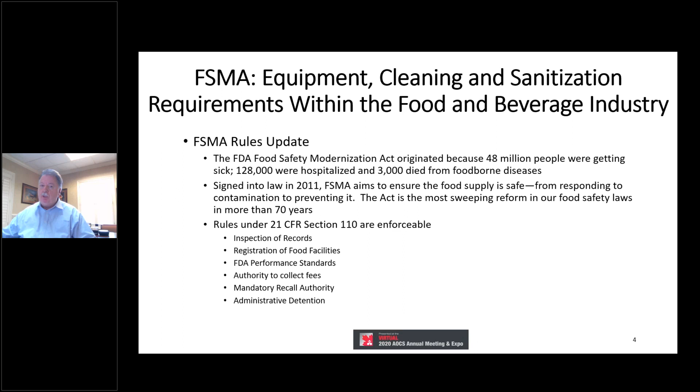The goals of FSMA are that we want to assess and implement preventive controls on a broad basis. In essence, we want to fully understand what and where are your risks and what appropriate controls are preventing those individual risks. The FDA expects that they will be going from reactive to proactive in the preventive strategy, which is the essence of FSMA. And the expectation is the preventive control rules for the initial enforcement focus. Expectations are that there is an active monitoring program within your food facility with corrective actions taken that are proactive in your food safety plan.

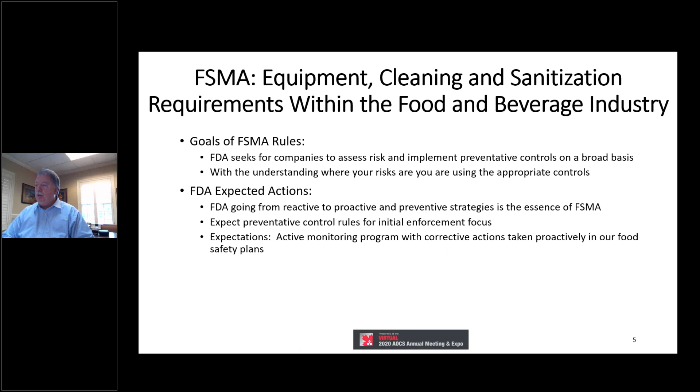Specifically, Subpart L deals with protecting food from intentional adulteration, where the intent is to cause large-scale public harm. For the purposes of this review, we will focus on Subpart L only, which addresses equipment, building design, and cleaning and sanitization procedures. This rule does require that a food facility must implement measures to protect food against intentional adulteration. In addition, it requires domestic and foreign facilities to address vulnerable processes in their operations to prevent acts that could cause large-scale public harm.

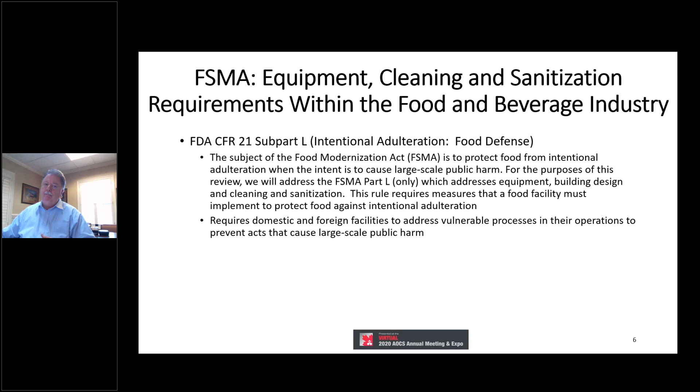Now, I realize this is a little bit of an eye chart, but hopefully you'll focus on the dates to the right. This is a publicized FSMA document that identifies the critical dates of implementation for food facilities. They're broken out by the size of the company. For instance, a large business is considered to be 500 employees or more. And then there's small business as well as very small. One thing I want to emphasize is that a lot of these dates have either come, are here now, or are very, very soon for the small businesses. So the emphasis here is FSMA rules are enforceable based upon these dates.

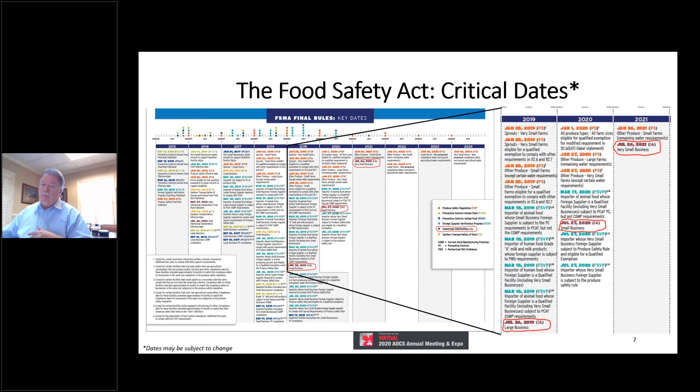The FDA guidelines specific to Subpart L, again, identifying possible routes of microbial contamination in produce, set the requirements to prevent the introduction of pathogens. So in essence, equipment, tools, and buildings are one identified route of contamination because they may contaminate the produce with pathogens, and adequate cleaning and sanitization is an important part to minimize that contamination.

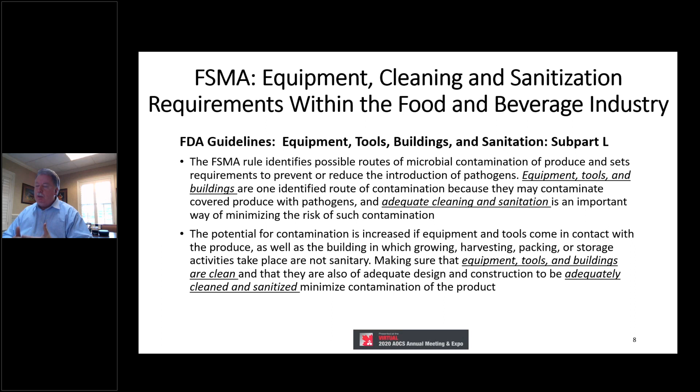The potential for contamination is increased if those equipment and tools come in contact with the product, as well in the farming sense for growing, harvesting, packing, or storage activities that take place that are not sanitary. So in essence, we as food facilities have to make sure that our equipment, tools, and buildings are clean, and they are also of adequate design and construction to be adequately cleaned and sanitized and to minimize the contamination of our products.

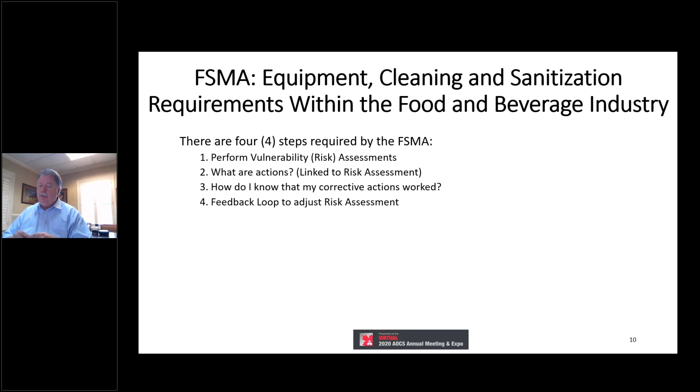So those 4 steps required by FSMA are the following. Number 1, you must perform vulnerability risk assessments. 2, what are the actions associated? Again, you create the action steps directly out of those risk assessments. 3, a question needs to be asked, how do I know that my corrective actions worked? And finally, there must be a feedback loop in order to adjust the risk assessment resolutions.

So I won't take the time to go through the bulk of this discussion here, but just understand the risk assessment is a requirement, and the risk assessment must be prepared by someone that's competent in developing it. The overall goal is to identify your critical control points. These must be identified in a manner that if it's a risk, then there must be a plan to prevent that risk. That could come from a design change, or it could come from an operational change to minimize that risk. That preventive action is really to deliver how to avoid the contamination itself.

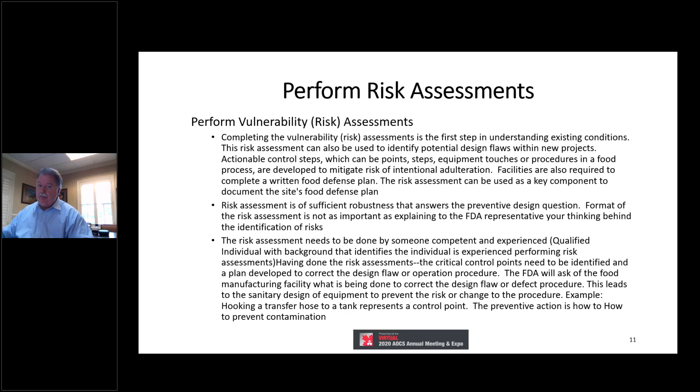Now, one point I'll emphasize with the FDA: there certainly is a lot of focus from the FDA, particularly in terms of the drug environment, as well as contamination from foreign suppliers that are selling food in the continental U.S. or North America. And an argument could be made that says, well, the FDA is just too busy, I don't see them show up at my facility. Well, you need to reassess that judgment. The reason being is the FDA is assigning more third-party companies to perform those assessments, and they're sending letters of compliance to food facilities.

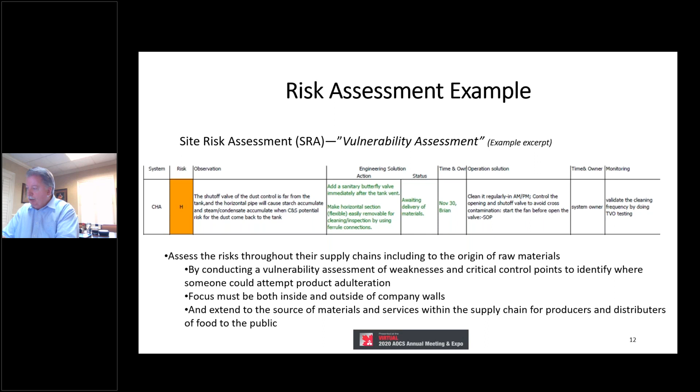So the questions to ask in terms of the risk assessment development is who has access to those critical control points and the food material risk areas itself. Pay close attention to those 4 key areas that we mentioned: the mixing and grinding areas, the ingredient handling, the bulk liquid receiving and loading, and the liquid storage and handling. Those are focus areas that the FDA will gear toward the assessment and risk areas itself. So in essence, you should be prepared for that.

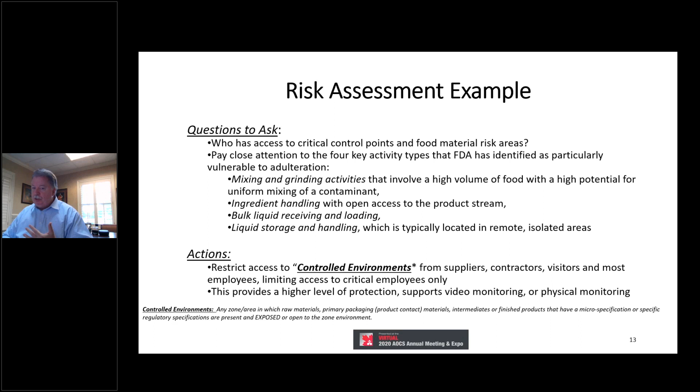The actual actions itself, you need to restrict access to what we call controlled environments. And that includes suppliers, contractors, and visitors, and most employees, limiting the access to those critical points, specifically within your food facility. Those controlled environments itself provide a higher level of protection, both in terms of airflow and material flow. It also supports video monitoring as well as physical monitoring.

Now, this is a design in its simplistic block form for a facility design. And a lot of facilities that have been put together, particularly in terms of a brownfield operation, in essence what you have is a dirty side where you've got your raw material incoming flow, and you have a clean side where you actually induce micro control level. And in the middle, you have a kill step, which could be like an extruder that actually takes it to a 5-log position to minimize microbial risk itself.

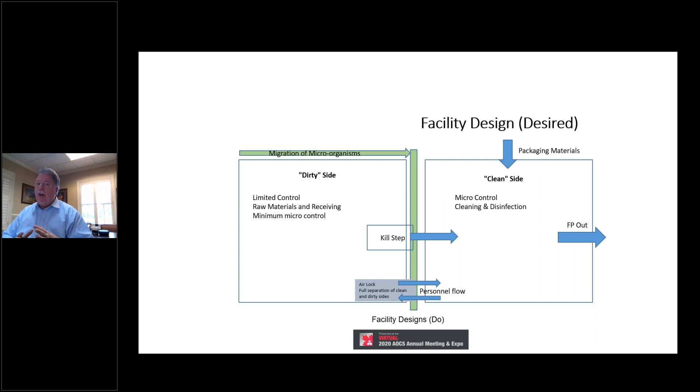The problem with this design is you not only have material flows going back and forth between your dirty and clean side. So envision a forklift that its wheels are dirty and it's directly transferring that contamination from the dirty side to the clean side. Likewise, personnel flow need to be restricted from the dirty to the clean side. So objectively, what you want to have is a physical separation, even to the point of having badge control for your employees. You want to keep your forklifts that are operating in the dirty side from even going into the clean side operation. This is the emphasis itself.

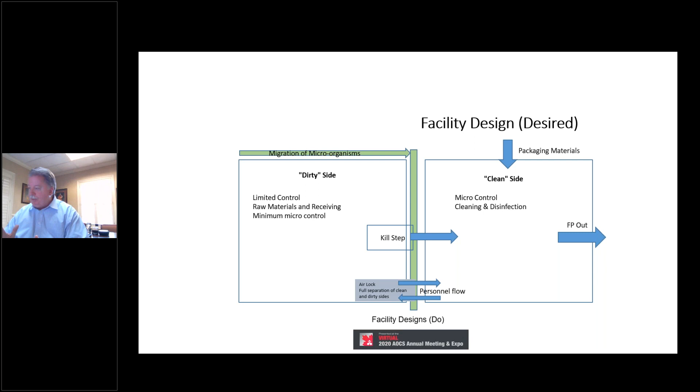Also in terms of the actual passage between the dirty and clean side, you want to maintain that even through a double door airlock. And what you want to maintain is an air pressurization to where the clean side has positive air pressure as compared to that dirty side. So you want to keep the dirty air out of the clean. So you literally want to have about a 10 to 15 Pascal difference between your dirty and clean side, and your airlock needs to be at least a 5 to 7 Pascal difference as a step up point.

So in addition to the development of those risk assessment exercises, some of the key points is to ensure that you're developing equipment standards and specifications for the following: the bulk liquid receiving and loading, the liquid storage and handling, the secondary ingredient handling, mixing and similar activities, again, those top 4, but also areas defined by the controlled environment. Any open product, whether it be in a tank or a pump, heat exchanger, or your primary packaging filler, before it reaches that final package, must be in a controlled environment itself.

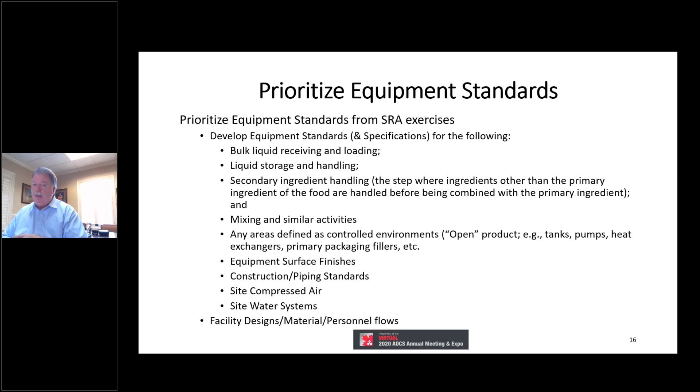What's key is equipment surface finishes, your construction and piping standards, your site compressed air. Point of use, you should have that compressed air filtered to 0.2 micron. Your site water systems are so critical in terms of keeping microbial control, in terms of having a robust RO or a deionized water system. And as mentioned in the previous example, having robust facility design that manages not only the material but personnel flows also.

Those equipment standards in itself, and again, this is an eye chart, so I apologize for that. But the point that I want to identify is there's a level of preferred clean design, a moderate, or even a high risk. The high risk, which is listed in red, if it's designed to those standard levels, the probability that you will have a micro hit is very high. The moderate risk, if systems are designed to that level, you will probably have to have operator intervention to maintain that risk control itself.

Minimal risk, or the preferred clean design, are standards that assist a food facility to maintain the proper surface finish, the proper design, particularly in terms of having full CIP versus COP control. And that stands for clean in place versus clean out of place.

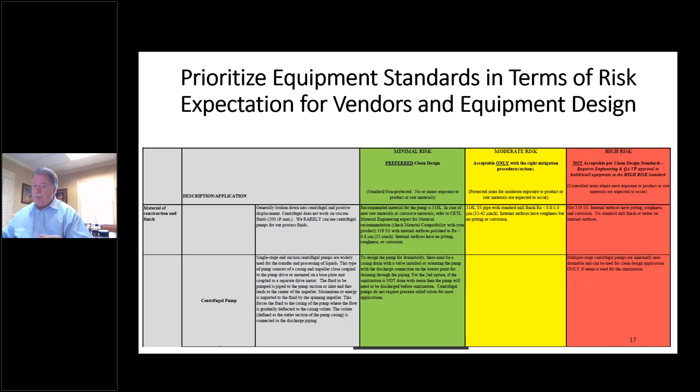As I mentioned, for those equipment specifications, one of the key points is surface finish requirements. All your food facility material surface finish should be designed to an RA value of 0.8 micron or 32 microinches. Now, I put this chart as a comparison to BPE standards itself, which calls out 0.41. But again, 0.8 micron level for an RA value is very achievable.

I would avoid specifying surface finish like, in essence, a 2B mill finish. A 2B mill finish, or examples such as that, is a subjective evaluation, whereas an RA value is actually measured with a profilometer. This actually measures the irregularity of your surface finish and minimizes the microbial contamination that could fall within the crevices of the actual surface finish itself.

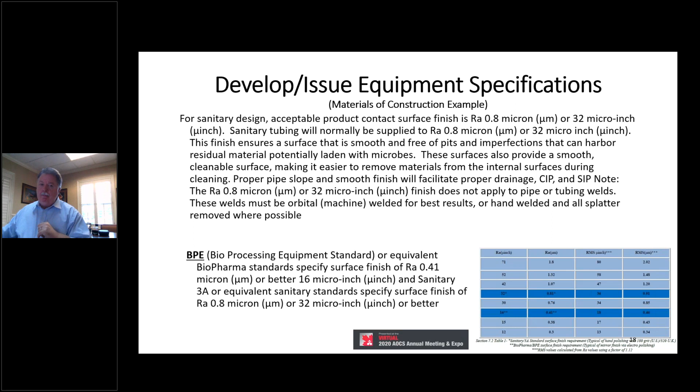In addition to that, in this example, we provide equipment piping examples. So this is very paramount in terms of overall design for your piping system. What you want is a piping system that's fully drainable, so when I clean and sanitize, I can actually achieve full drainability.

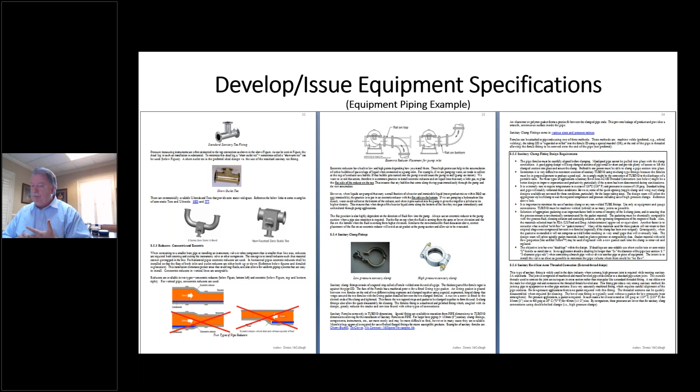As I mentioned, there were 4 steps required by FSMA. The second step is, what are the actions associated with that? So again, the first question to ask is, can I design the control point out? The second question is, what are my operating procedures if I cannot design it out? As an example, with a tanker transfer hose, a procedural change may be to steam clean that hose, CIP, SIP, clean in place, sanitize in place, prior to each use.

The third question to ask is, is there something in the process that minimizes the risk, as an example, the extruder kill step, within the manufacturing process itself? So depending upon that kill step, that may identify a potential risk adverse situation.

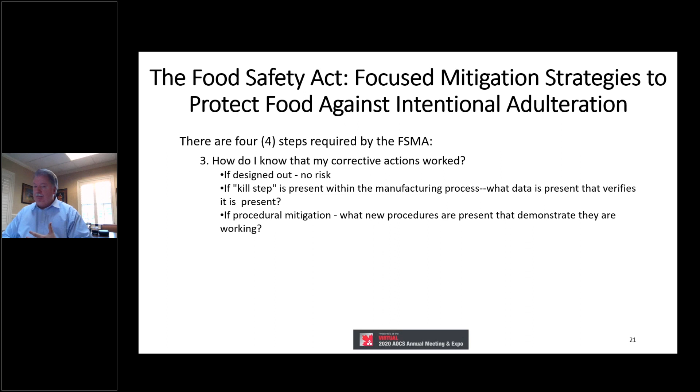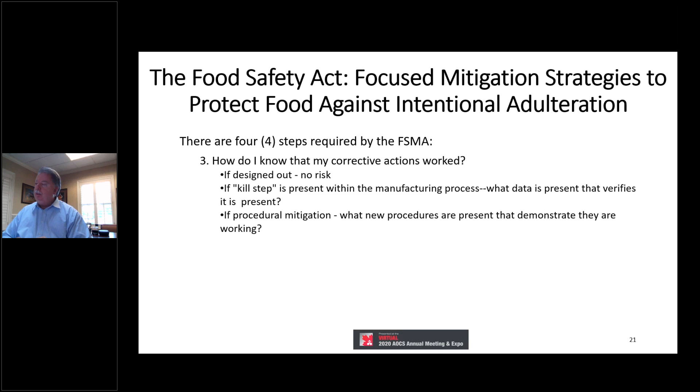Going on, the third item is, how do I know that my corrective actions worked? If I've designed it out, then you've solved it. There's no further risk associated with it. If a kill step is present within the manufacturing process, you must supply data that verifies that the kill step solved it. So in essence, if I have a kill step, am I killing to a 5-log rule? And again, the FDA will want to see that data. If it's a procedural mitigation, what are the procedures that are present that demonstrate that those changes are actually working?

And finally, on the 4 steps required by FSMA, there must be a feedback loop to adjust the risk assessment itself. And that feedback loop ensures that the risks have been fixed or mitigated, or it may include another risk assessment performed to further resolve it. This could be further supported by using qualified outside organizations. An example would be the American Institute of Baking, AIB, to know that you're doing these assessments and that your control point and issues have been remedied.

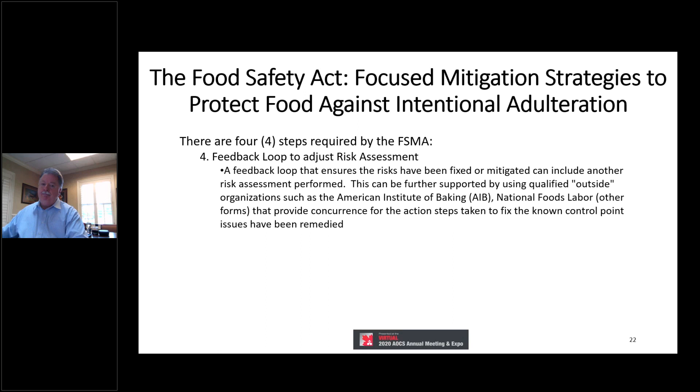Next, we'll talk about cleaning and sanitization requirements to protect food against intentional adulteration. So a couple things in terms of intentional contamination. It can take several forms. It could be an act of deliberate contamination, and that could take the form of chemical, biological, or radionuclear agents for the purpose of injury or even death. There is the bioterrorism that we often hear about in terms of potential risk, and those are generally toxins that are targeted at civilian populations. Biosecurity itself, again, those are preventive measures designed to reduce the risk of transmission of those diseases, pests, species, and even living modified organisms. Now, overall, cleaning and sanitization procedures are a preventive part of this biosecurity.

For biological agents, accessibility is a measure of ease in which the attacker can physically access the intended target to intentionally contaminate the food. The vulnerability is a measure to which that contaminant can be introduced. The production of contaminants themselves, the quantity, the storage and transport, and the technical expertise that go into that, with proper control measures, can be identified through microbiological testing.

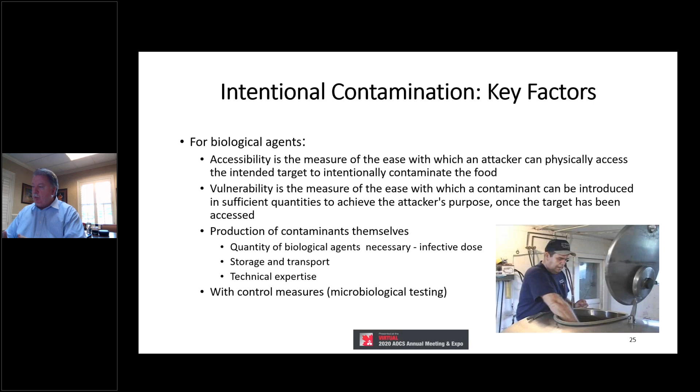So the methods of intentional adulteration, again, could be an exterior attack, forced entry, a covert entry, and or insider compromise. Now, for covert actions and insider compromises, if a biological agent is used, cleaning and sanitization can help.

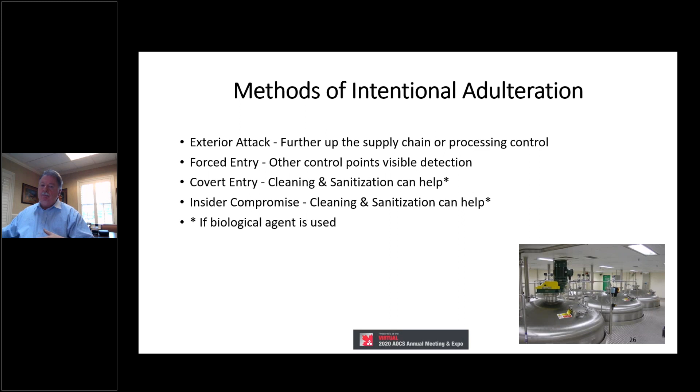So let's talk more in depth about cleaning and sanitization. The point that I want to focus on in this discussion is they are two completely separate steps. Cleaning is a precursor to sanitization. Cleaning has similar requirements in terms of design of equipment and facilities, and similar discipline is needed for both cleaning and sanitization, both in terms of procedures, the validation of its effectiveness, and the documentation of completion. Cleaning is also usually only tested against the product and not a threat, so the potential expansion is a part of the food defense plan, whereas sanitization is a reduction of microbial levels to where they don't present a risk to our process, product, or consumers.

Now, people often ask me what is the duration for cleaning and sanitization? Cleaning can be any amount of time in terms of definitively delivering what is clean. So in essence, cleaning can be 5 minutes provided it delivers the intended result. Sanitization, however, is a follow-up step that must be performed either through chemical means or through moist heat application, and that's usually at a prescribed set duration of time at a specific temperature.

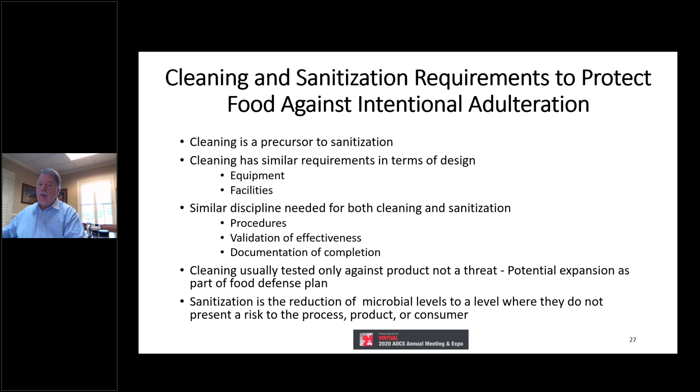And the point again about sanitization, it is not sterilization. In food processing, we are not sterilizing. Focus is on reduction of micro risk versus elimination. Sanitization is essentially a preventive action that's part of our HACCP, HACCP being our hazard analysis and critical control points.

And it can be used as a corrective action depending upon the organism type and number. And it already should be a part of our food safety plan. We should be applying both steps, cleaning and sanitization, after any kill step process. And the emphasis here is it must be validated in terms of repetitive action.

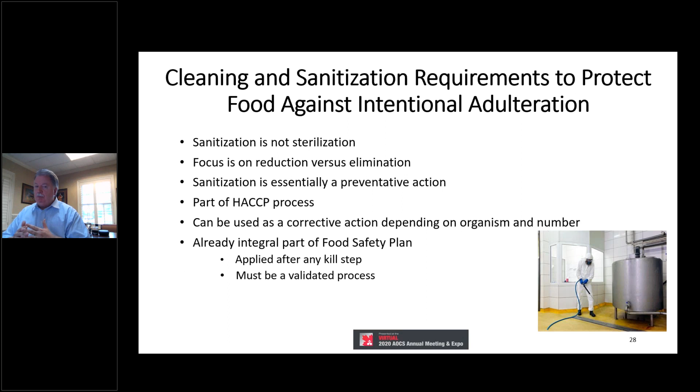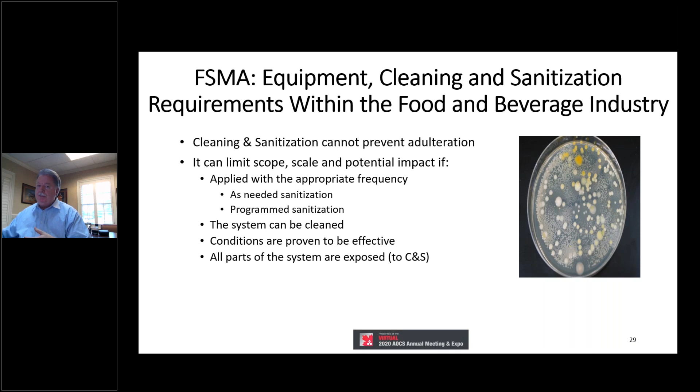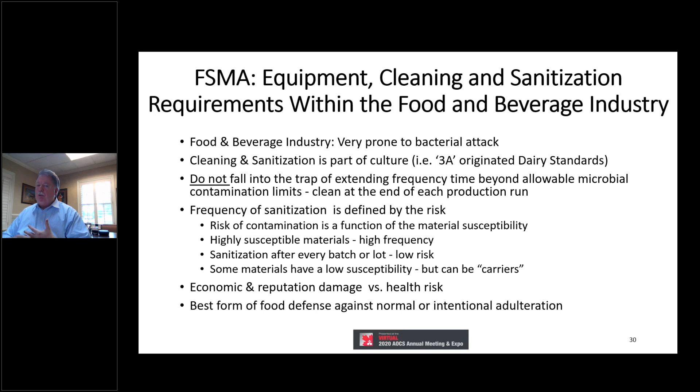The frequency of sanitization is defined by the risk itself, meaning the risk of contamination is a function of material susceptibility, as we mentioned in the TVO example. Highly susceptible materials are potentially going to require a higher frequency of cleaning and sanitization. Sanitization after every batch or lot may be a lower risk, but some materials that may have low susceptibility can be carriers. Our economic and reputation damage against the health risk must always be evaluated, and the best form of food defense against normal or even intentional adulteration.

So cleaning and sanitization in summary: the equipment and process must be designed to be cleaned and sanitized. Objectively, we should be targeting systems that have full CIP, clean in place, and sanitize in place capability versus clean out of place and sanitize out of place. The risk itself depends upon the susceptibility of the materials and the control measures.

If we do have a kill step and it's late in the process, the objective is to minimize the actual risk itself. Frequency is the key for cleaning and sanitization. We want to optimize between risk and impact. And as mentioned, it must be a validated process. For the overall risk, accessibility control is key.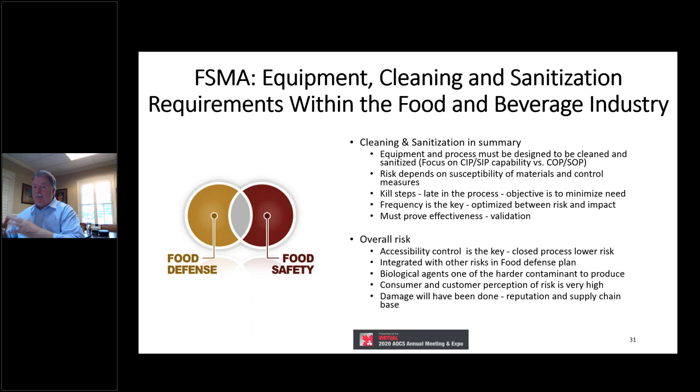We want to have a process that has a lower risk, but integrated with other risks within our overall food defense plan. Biological agents, as noted, are one of the hardest contaminants to protect against, and the consumer and customer perception of risk is very, very high. And the damage done will also damage our supply chain base itself.

Actions to support FSMA, specifically Subpart L: review and verify that your employees know and understand your company's food safety plan. Make certain that they understand the FDA and FSMA requirements associated with overall food safety, particularly in terms of whether your operational documents are current, complete, and detailed. Assess your written food safety plan. Look for gaps. Look at food safety policies, HACCP compliance, allergen management, and even your current good manufacturing practices.

Confirm your company's policies are visible and being followed, including separation of personnel and material flows away from controlled environments. Recall the facility design in terms of separating the dirty from the clean side. And we want to ensure adequacy of the internal audit program to FSMA requirements. Utilize your vulnerability risk assessments to prioritize the equipment and building design standards. That is a very key part of your food defense plan.